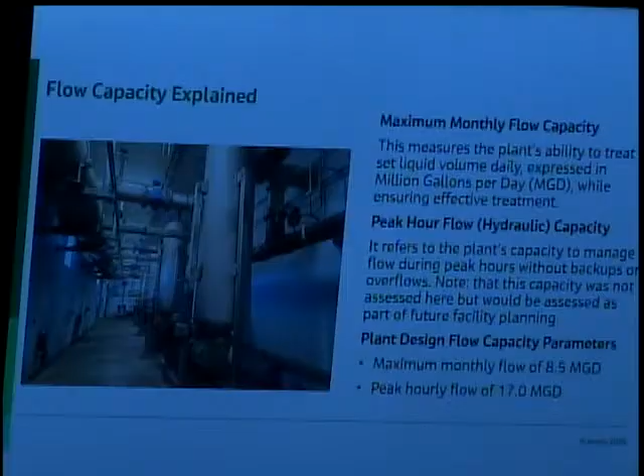So I don't want to confuse those. The plant is designed for a maximum monthly average flow of 8.5 MGD and a peak hour flow of 17 MGD. So those are completely different numbers.

The 8.5 MGD is the max monthly flow that the plant can sustain and treat the wastewater at the concentrations it was designed to treat. The peak hour flow is 17 million gallons per day. That's what they generally refer to as hydraulic capacity - what we can take into the plant during a heavy rain event, or during Cherry Festival, without overflowing the tanks. The plant can handle 17 MGD over an hour, but we're not going through that analysis on the peak hour. We're going to stick to just the monthly max, but I wanted to explain that difference.

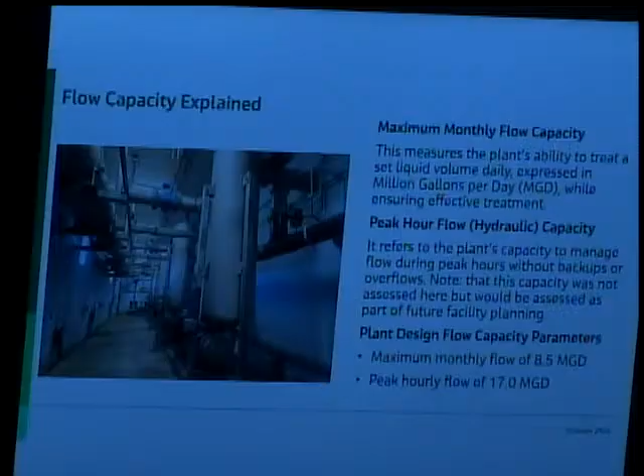The other parameter we're going to look at is loading, so organic loading. We measure organic loading using a test called BOD, or biochemical oxygen demand. All that is, we see how much oxygen demand is on that water, and that tells us how strong that wastewater is. It's commonly referred to as the strength of wastewater.

The wastewater treatment plant was designed to handle up to 20,200 pounds of BOD per day. This is based on that 8.5 MGD flow. While we monitor other nutrients as well, like ammonia and phosphorus, we'll be sticking to going over the main one, which is organic loading. Organic loading draws the highest oxygen demand in the plant, so that's usually the most critical one for design.

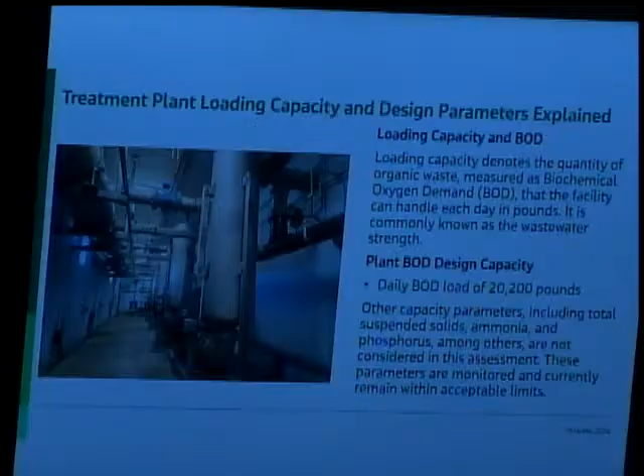Touching on EGLE's recommendations for planning, there's no set-in-stone number you have to reach before you need to upgrade. They provide a guideline of 80%. So if the plant reaches 80% of capacity, they recommend that's when you begin planning for expansion, or at least doing capacity analysis to figure out what you need to do in the future. Once you hit 90% capacity, that's when you should be applying for permits and beginning construction for expansion.

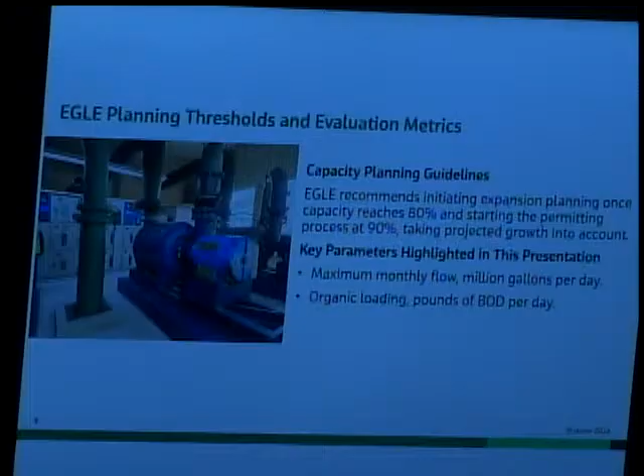Again, these are guidelines. Can I ask a quick question, Mark? Yes. Just, I think sometimes we hear people hear 80% and then they think that's the max, so I appreciate you clarifying that.

Sure, so it's a 10% difference between these two numbers. What's kind of worst case scenarios in your professional experience - you hit that 80% and have to start planning - realistically, barring an entire city being built on top of a city that's already there, how long with most average growth does that 10% take to hit? Would it be a 5-year plan, a 10-year plan?

That's a great question, and I will touch on that a bit later. But to answer briefly, you pretty much would need to know what the growth rate is, because that matters. Typically it would take years to get to that point, but if you're growing exponentially year over year, that changes things. So that would be part of a facility plan and doing a full capacity study.

But we haven't seen growth like that in our area, in Traverse City - at least not those numbers that we've seen so far. We've seen a lot more growth in the last few years than what we have in the past, but that would be best done in a full capacity study.

Okay, great, thank you. Just a real quick question to piggyback on yours - when we start talking about capacity, we've been talking about the membrane train replacements, and I wondered if adding a membrane train would reduce the amount of stress on the existing ones and get more life out of them. Does adding a membrane train increase the capacity?

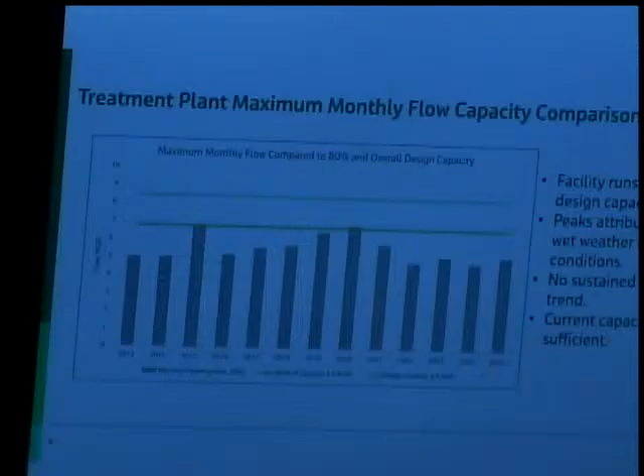So here's a monthly flow capacity comparison. The upper turquoise line is the 8.5 MGD design capacity for monthly maximum flow. The lower green line is the 80% planning threshold, around 6.8 MGD. The gray columns are our max monthly average flow for that given year, in the calendar year, typically occurring in July or August around Cherry Festival, the busiest time of year.

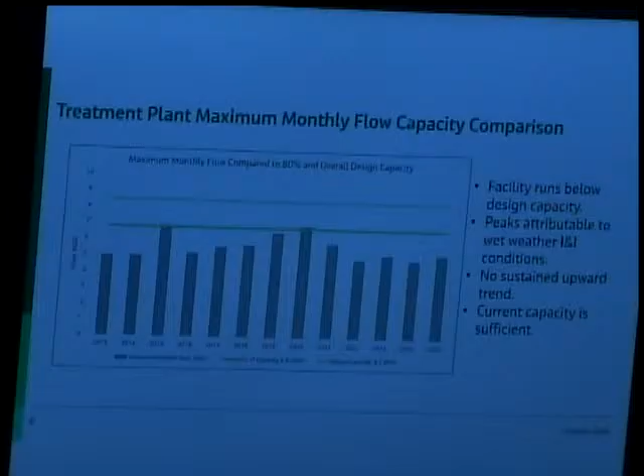We had a couple peaks in 2015 and 2020 where we actually touched or just barely exceeded that 80%, and then it dropped right back off. We can associate those with high lake levels and a lot of I&I from heavy rain events, especially around 2019, 2020. But the good thing is the facility is consistently remaining below that threshold, except for those couple peaks.

And there's no sustained upward trend in flows, which is good to see. Right now, our current capacity for 2025 — July was our highest month, and we were about 62% capacity. Just for reference, the annual average daily flow in the plant, averaged over the whole year, is about 4.4 million gallons per day, so just over 50% capacity.

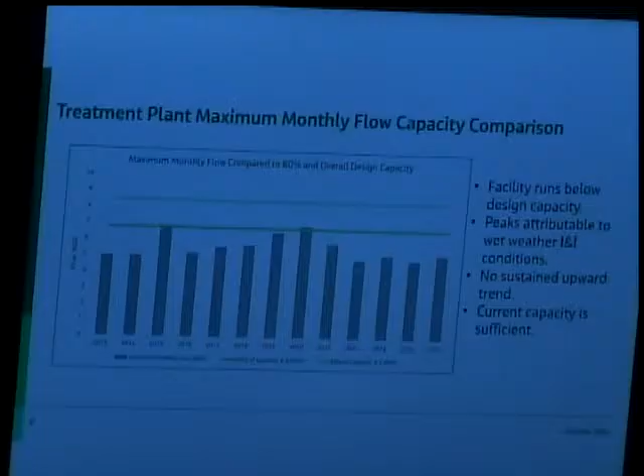Mark, I have a quick question. So for the EGLE requirement of the 80% capacity, when is that triggered? For instance, in 2020 we hit it, in 2015 we hit it. Is it over a certain period of time? If we saw a sustained trend of that, and it was constant and multiple months were exceeding and we were continuing to rise, then I would think that would trigger it — if you're hitting that multiple times.

We know the cause of that at the time — the high lake levels, the I&I. The city's obviously been addressing a lot of I&I with lining pipes and such, so we can control that. We saw that was definitely the issue there. So do we respond to EGLE when we hit it, or is it just ongoing? No, we just audit and track it. Okay, thank you.

All right, so— nope, oh, I'm sorry. It seemed to be, in that last slide, sort of a wave pattern with peaks in 2015 and 2020. I wondered if you went back further before 2015, are there external factors? Do you see that same pattern of peaks and valleys? I would assume we would, but I did not go back that far. I certainly can if you want me to, but I didn't go back to that.

And you mentioned high water levels as being one factor — anything else that jumps out? The heavy rain events themselves. Okay, and thanks — 2015 had that huge storm that hit both counties really hard, yeah.

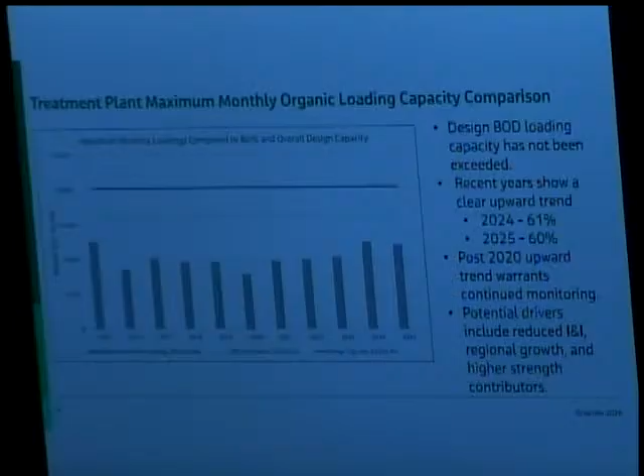So this trend here is just showing the monthly organic loading, maximum organic loading capacity comparison of the plant. The upper gray line is our 20,200 pounds per day design capacity for loading. The lower blue line is the 80% threshold. The plant is well below that, running around 60% at the peak month in 2025. The one thing to point out, though, is from 2020 on there's a pretty consistent rise in that loading.

So that's something we want to keep an eye on. This kind of goes back to what Laura was asking — if that trend continues and we're moving up a little faster than we'd like, then that would trigger us doing a deeper dive into this capacity analysis.

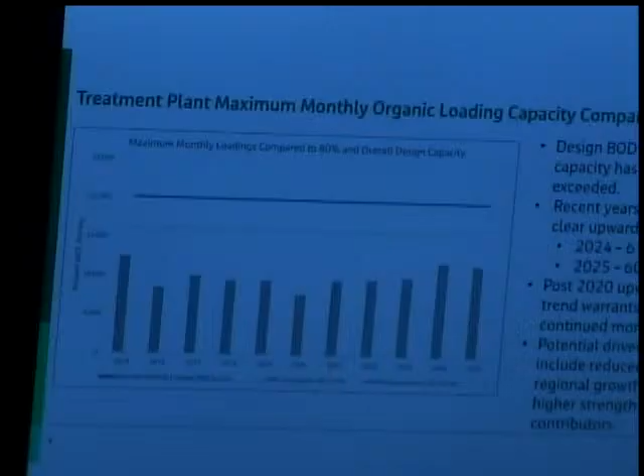I have a question. It looks to me from the data that it's the townships that are really contributing to this BOD loading. We don't have a problem right now—it seems like everybody's within their allocations, but it could be a problem in the future. The city is pretty stable, not moving around very much, but the township is increasing.

So when do we decide that we need to start planning? And how are you thinking about this while you're also working on the master sewer agreement?

I do touch on that, and I will go over the MSA as far as where we stand with the city and townships against the MSA capacities. But I'd suggest, as part of a facility plan—because there's portions of the treatment plant that are older and haven't been upgraded, we're doing a big upgrade now on the headworks, and we did the membranes back in 2004.

But there are other processes that are more biological, like anaerobic digestion and activated sludge. All those processes work together and should be evaluated together through a facility plan, so we have a detailed capital improvement plan going forward. Part of that would be collaborating with the townships and the county, figuring out the full capacity of the system as a whole, and going over the loadings from the townships and everything else.

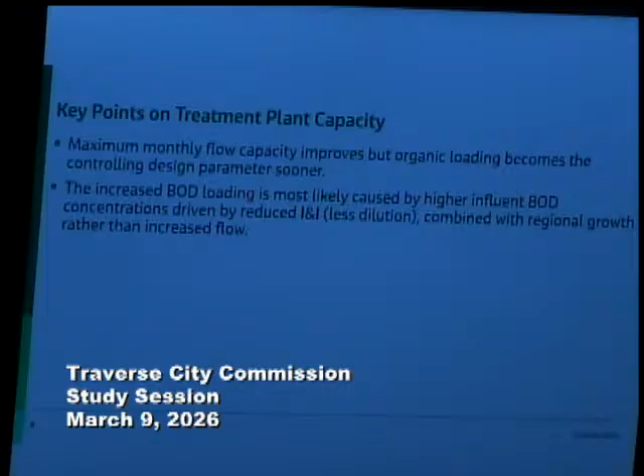So just some key points here: the trends of organic loading are what we want to pay the most attention to, making sure we're on top of that. It does suggest that the BOD loading is most likely caused by higher influent BOD concentrations driven by reduced I&I, combined with potentially regional growth as well—all things that would be part of a full capacity analysis.

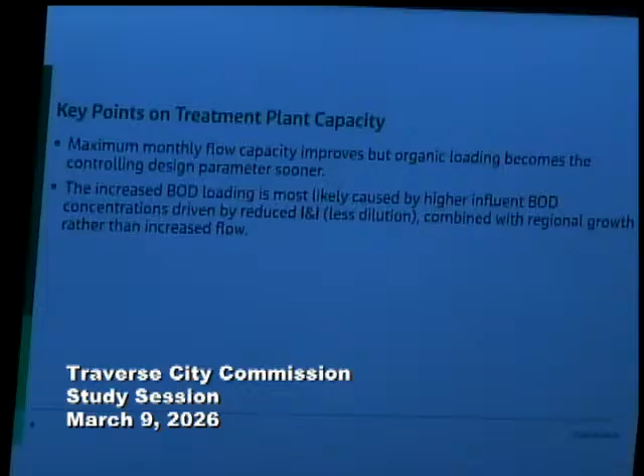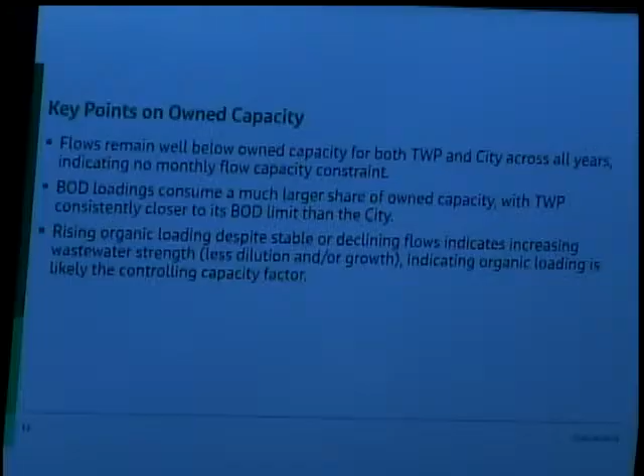Key points on own capacity: flows remain well below own capacity for both. The BOD loadings consume a much larger share of the own capacity, with the township consistently closer to its BOD limit than the city's. Rising organic loading despite stable or declining flows indicates increasing wastewater strength, less dilution, and/or more growth, indicating organic loading is likely the controlling capacity factor.

The main takeaway of this presentation is that, based on current operational data and planning standards, there's sufficient monthly flow capacity and organic loading capacity. However, this review is not a complete capacity evaluation and does not cover all unit processes or potential expansion scenarios at the treatment plant. While there are no ongoing flow-related capacity issues, that organic loading trend is something we want to keep an eye on.

As I mentioned earlier, our recommendation would be a comprehensive capacity study to guide long-term planning and development of the wastewater plant, including stakeholder collaboration with the county and townships. That's in the CIP for next year.

It is. Great. Yes. Go ahead, Mitch, and then Jackie.

Looking at growth projections in the city of Traverse City, yes, we have a lot of capacity. We have a lot of use in both residential and commercial, but we don't have a lot of undeveloped land. We have exactly zero legacy septic systems in the areas fully covered by our sewer system. But if you go outside the city, you find significant portions of the township where it's a patchwork of areas covered by municipal sewer and areas on septic, and there can be new development opportunities that bridge that.

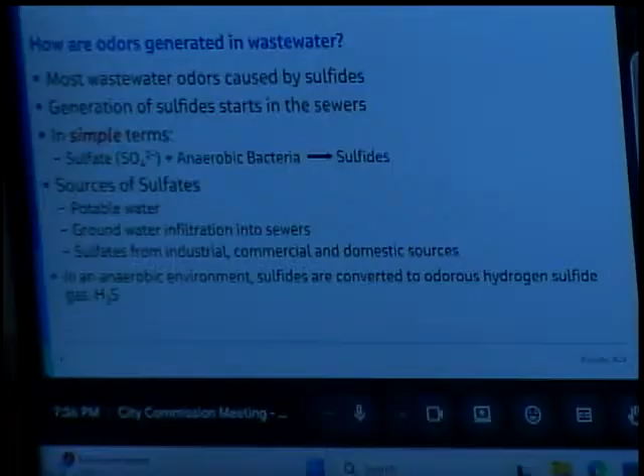So briefly, how are odors generated in wastewater? Most wastewater odors are associated with sulfides. Sulfides actually start in the sewer as sulfate, which can be present from drinking water, primarily for people on well water. When they use that at their tap, it ends up going into the sewer. As discussed earlier, infiltration of groundwater high in sulfate can contribute, and there are also some industrial, commercial, and domestic sources that make their way into the sewer. That sulfate, in the anaerobic environment that typically happens in the sewer, is converted to sulfide, and then also converted to hydrogen sulfide gas.

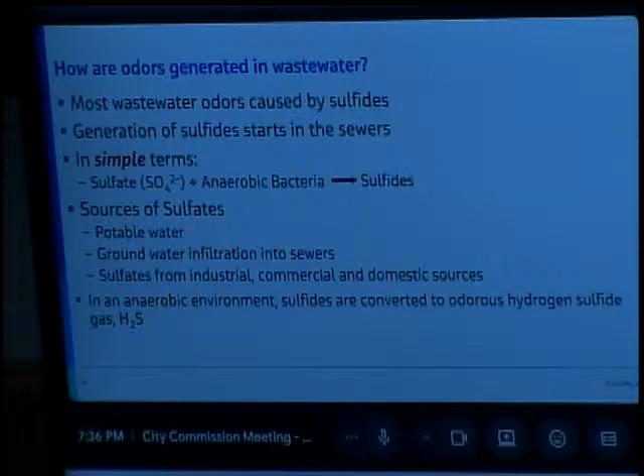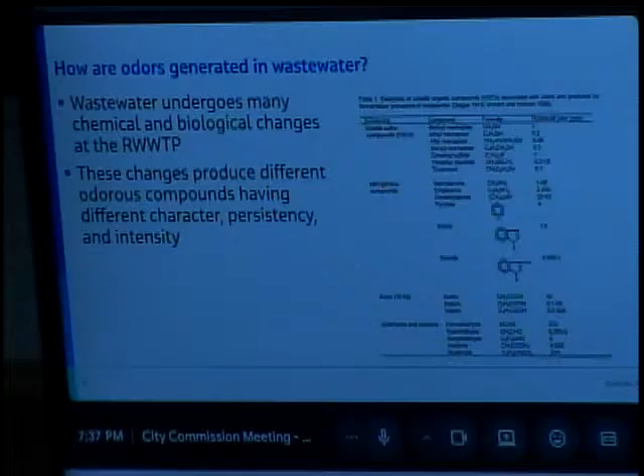Although we're often concerned with hydrogen sulfide, it's important to note that at a treatment plant there are a lot of different chemical and biological changes happening. What you actually see, summarized in this table, is that there's a number of different odorous compounds generated throughout the treatment plant at various processes and parts of the plant. We refer to these different compounds as having a different character, a different persistency, and a different intensity, and that's what makes odor control an interesting topic.

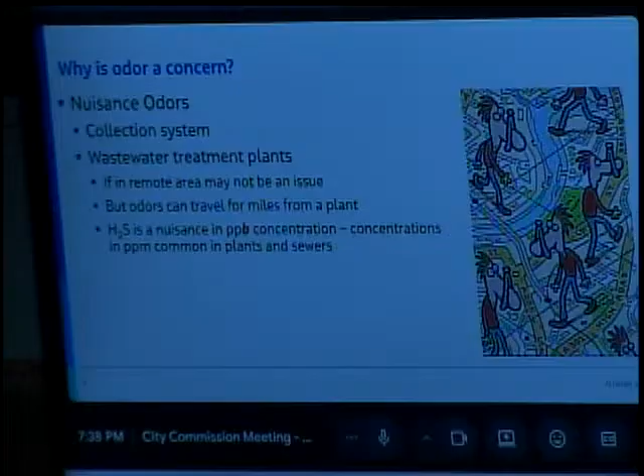So why is odor a concern? Looking at it from the perspective of hydrogen sulfide, it's a nuisance. In the collection system, it's a nuisance because the collection system extends out to where people live, work, and play, so if there's any venting in the sewer, those odors can escape and impact people. When we look specifically at the wastewater treatment plant, if the plant is not in a populous area, it may not actually be an issue. It might lead to some discomfort with plant staff, but you don't have to worry about complaints from neighbors right next to the plant. But odors can travel a long distance.

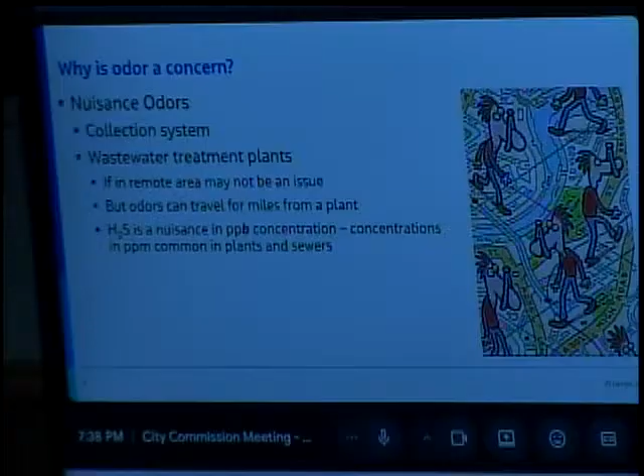Some perspective on H2S: it's a nuisance at the parts per billion concentration for the human nose. We can detect it at very low concentrations. But oftentimes some of the concentrations we see at a treatment plant or in the sewers are in the parts per million range, so 1,000 times more concentrated.

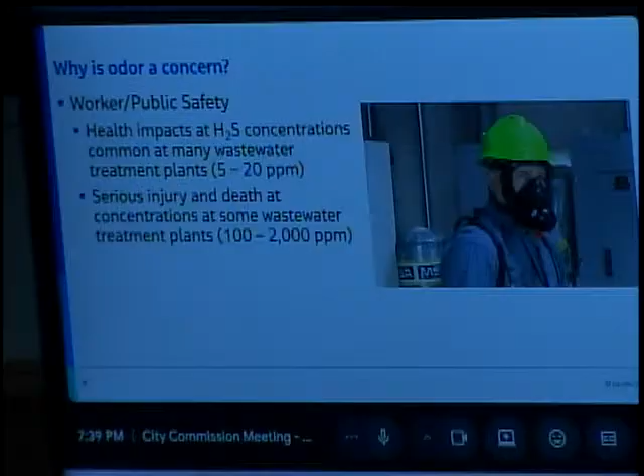Another concern is worker and public safety. At low concentrations, H2S can just be more of a nuisance - it's one of those compounds that has that distinctive rotten egg smell. At low concentrations, it may not have a significant impact from a health perspective, but at higher concentrations it can lead to serious injuries and even death. There have been reported cases of that, for example, when an operator enters a tank that is high in H2S.

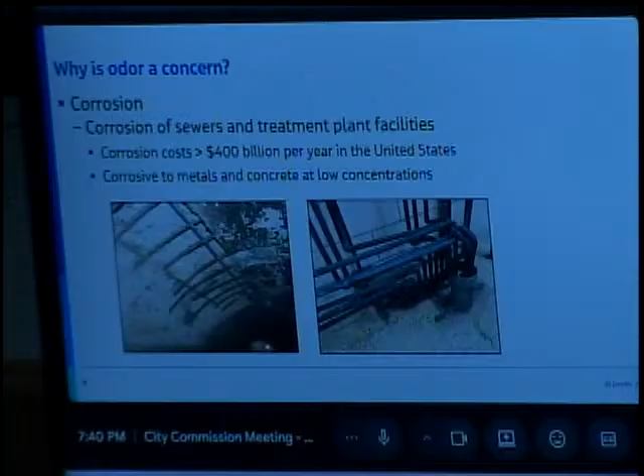And then lastly, another concern is corrosion. We spend a lot of money every year trying to address this continual problem. If we look at the sewers, as discussed earlier, hydrogen sulfide gas can actually also be converted to sulfuric acid. This strong acid reacts with the cement matrix that makes up concrete, and that's why you see it wear away and expose the rebar in reinforced concrete pipe - that rebar also corrodes. If you look at the lower right photo, you'll see this used to be bright, shining copper piping, and with exposure to hydrogen sulfide, it turns black and tarnished.

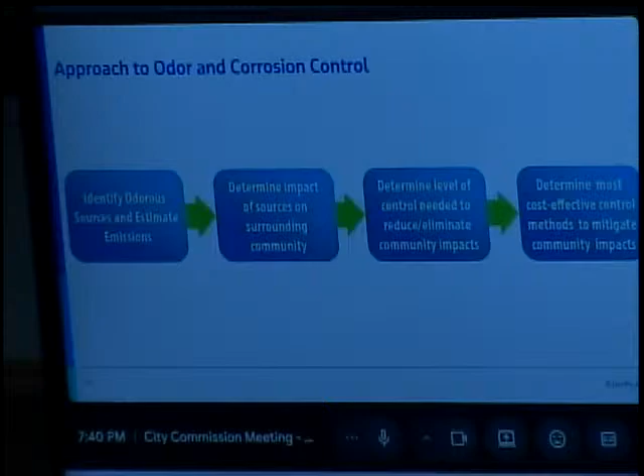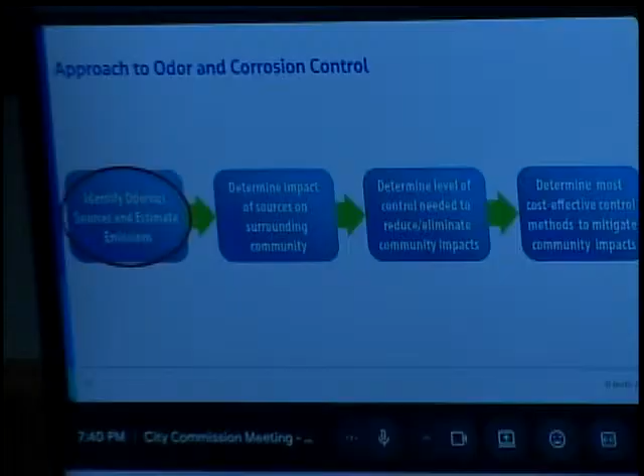So when we look at our approach to measuring odors and evaluating their impacts, we follow this more or less standard workflow. Every application is different, but this provides a good workflow for how we look at these analyses. The first step I'll talk about is how to identify odorous sources and estimate emissions.

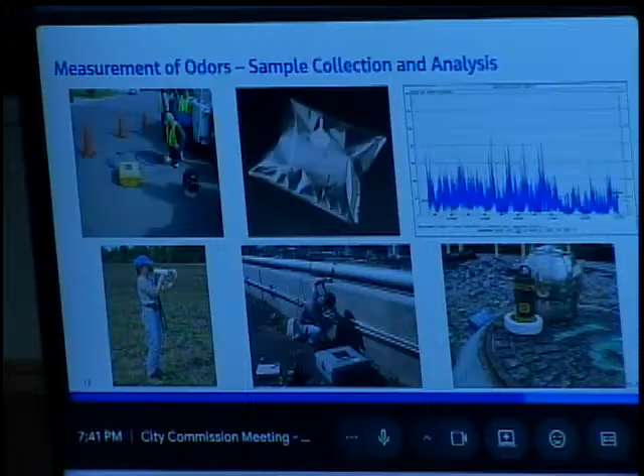The other application is taking grab samples. We've got a vacuum pump, shown with the yellow suitcase, or the gray one in the lower center photo. That vacuum pump is used to fill up a bag sample. So it's basically like taking a jar and wherever you are in the plant, capturing some gas that's in the ambient air. The nice thing about that type of analysis is that we can ship that bag sample to a lab and analyze it in a couple different ways.

One way is you can put it through a mass spectrometer gas chromatograph, that machine in the lower left, and there are different panels you can run. It doesn't tell you everything that's in that gas sample, but it allows you to measure individual components within that panel. But another way we do it is we take that gas sample and send it to a lab.

Typically the same lab can do both tests, but you measure total odor, characterizing the total odor impact of that combined gas sample. From that, we measure dilutions to threshold, which is like a proxy for a concentration of all those odors together. This is an interesting test because they actually hire people and test their noses to make sure they have an average nose.

If it's somebody who's got a really sensitive nose, they excuse them from the panel. And if it's somebody who can't smell anything, which I think we all know people who fall on both sides of that spectrum, they also don't want them on the panel. So they get a good average nose that sits on the panel, and they introduce increasing concentrations.

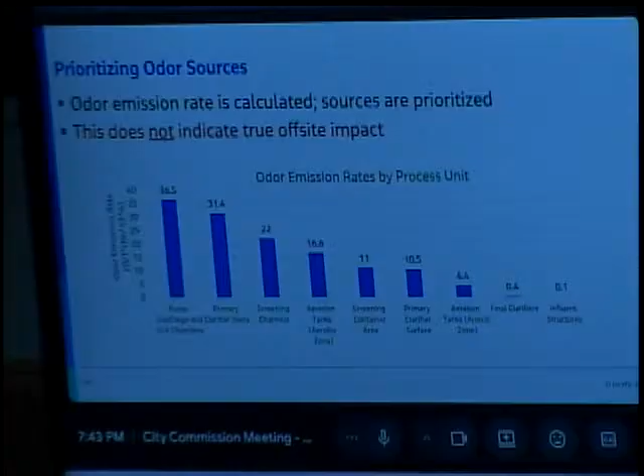They take that bulk gas sample and dilute it down to very low levels, then keep increasing that concentration until the person identifies a detection threshold - when they start to smell something. There's also a recognition threshold, which is when the human nose is able to identify it as something specific - not just 'I smell something,' but 'I smell it and it smells like X, Y, or Z.' So that result, the D to T odor concentration, we use to calculate the odor emission rate.

That doesn't tell us exactly the offsite impact, but it does allow us to prioritize sources. If you look at this graph here, an example from another project, you might look at the final clarifiers and say we don't really have to look at those further. Our main goal should be to look at some of those headworks processes like grit chambers, primary clarifier weirs, or screenings channels.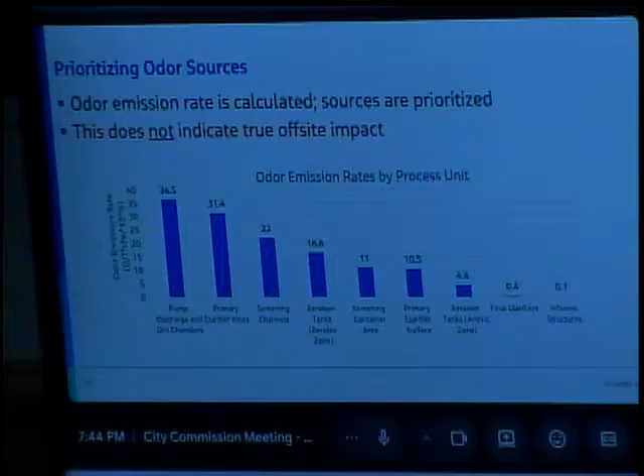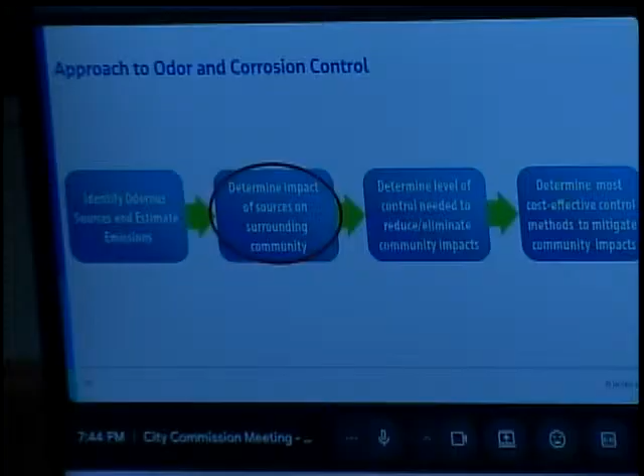It could be the surface of a clarifier or the surface of an aeration basin. The idea here is that there's some flux of odorous air, of mass, that leaves that surface and travels some distance. Eventually when it reaches ground level, let's say outside the plant fence line, it's been diluted. We get a sense for the impact of that dilution factor by factoring in all the meteorological data and also topography.

So it factors in wind speed, it factors in potential temperature inversions that might happen due to the topography. If you have a tree line, or in the case where you might have a large city with skyscrapers, it can look at the impact of those large buildings present.

The two programs we typically use are AERMOD, an EPA-issued program, and CALPUFF, which is a parallel that came out of California. The reason we'd use both in this case is because AERMOD is really good at capturing this information on a regional basis, but CALPUFF has this added feature that allows you to better capture meteorological effects when you're close to a large body of water. So the Great Lakes is a great example, or if you're on one of the coasts, CALPUFF does a great job of that.

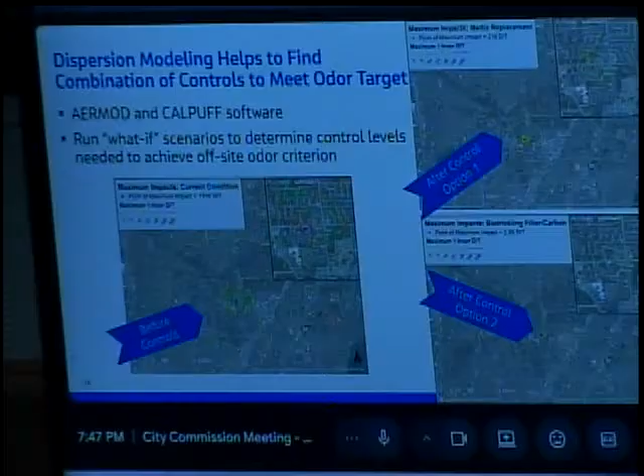And ideally, we can get this where that odor risk doesn't extend beyond the plant fence line, or if it does, that it happens at such a reduced frequency

that you effectively don't have any risk of odor complaints or any real impact to neighbors. Now, we do know that community engagement is something that you've expressed some interest in, and community engagement is a really good thing. It's sort of a double-edged sword in some sense for the utility, because it does require fielding complaints from neighbors if they arise. But the great thing is that you don't know if there's an odor issue unless people tell you about it. So that is a great data collection source.

And some of those odorants are highly associated with different parts of the process, and it might indicate to the utility we may have an issue with the aeration basins or the digesters. So there's a lot of good information that comes out of that.

The other part of it is that it shows your residents, your ratepayers, that you care and that you are competent in following up and seeing these things through, and that leads to a lot of trust and transparency, and also some motivation to study these things and move them forward.

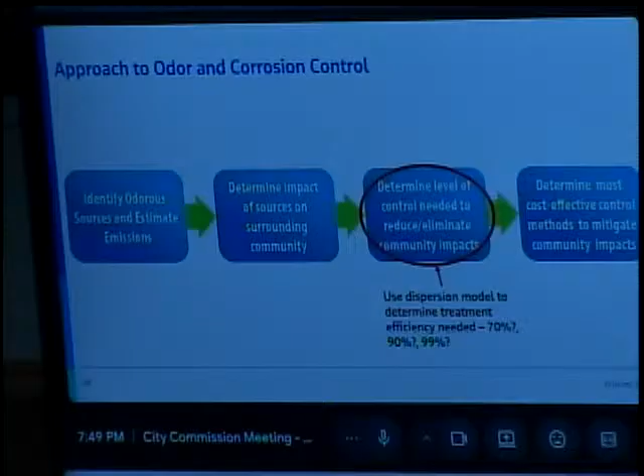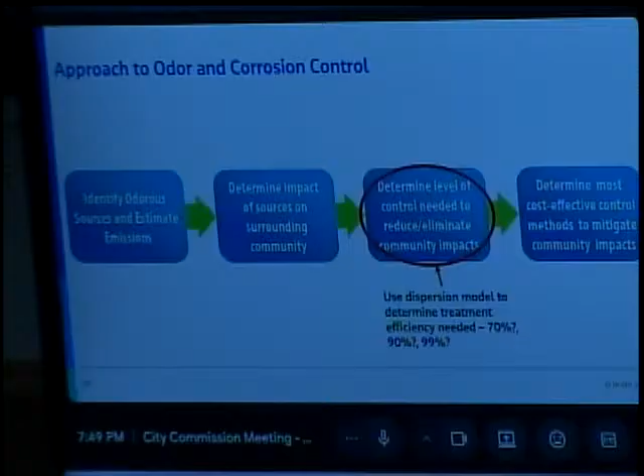So once we've done the air dispersion modeling, that helps inform us of what sort of treatment we may need. Sometimes it's treatment, sometimes it's actually prevention through design, or it might be an operational change that actually makes a difference. Maybe addressing leaks or addressing building ventilation rates, that can lead to some improvement.

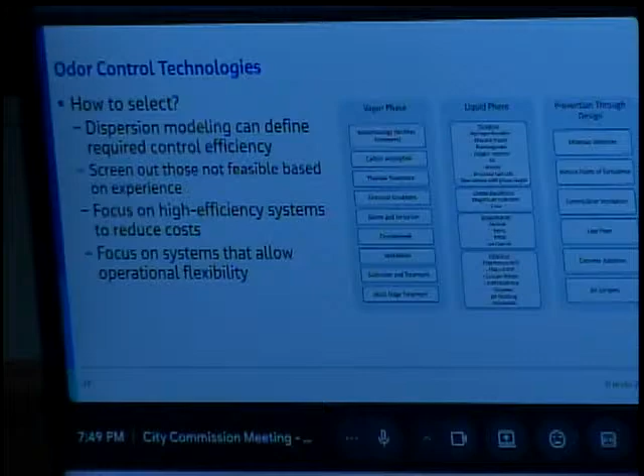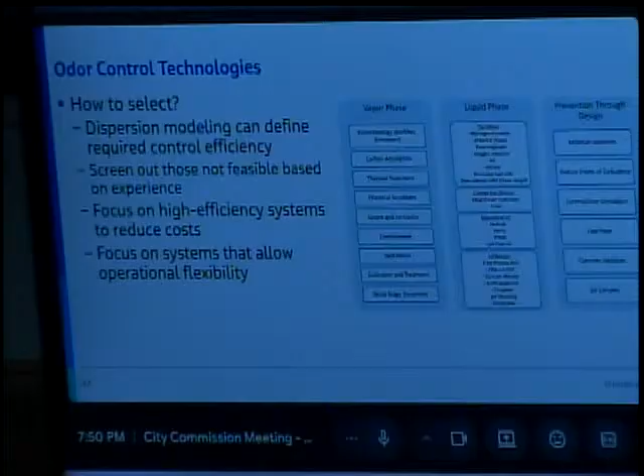I won't go through all of these technologies, but it's just to give you an idea of some of the options that we can look at. And we're well versed in nearly all of these. The ones that are sort of maybe questionable at this point are brand new technologies that haven't seen a lot of applications yet. So there's often a little more hesitancy with choosing those ones or pursuing them.

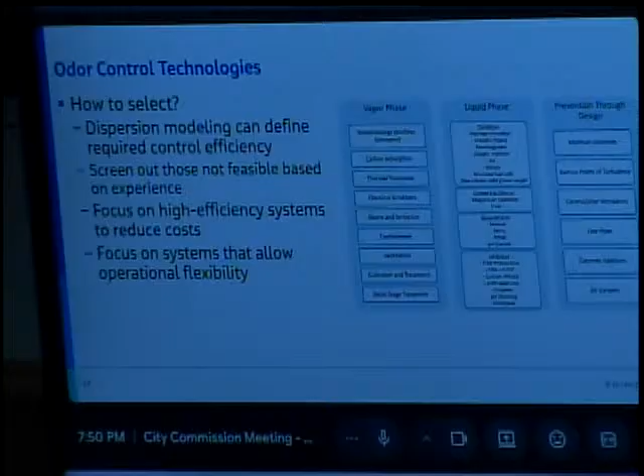But the nice thing is that we bring a lot of experience from our other projects to identify which ones are feasible, which ones have high efficiency, which ones give operator flexibility and have lower O&M costs associated with them. So that would all be part of this study.

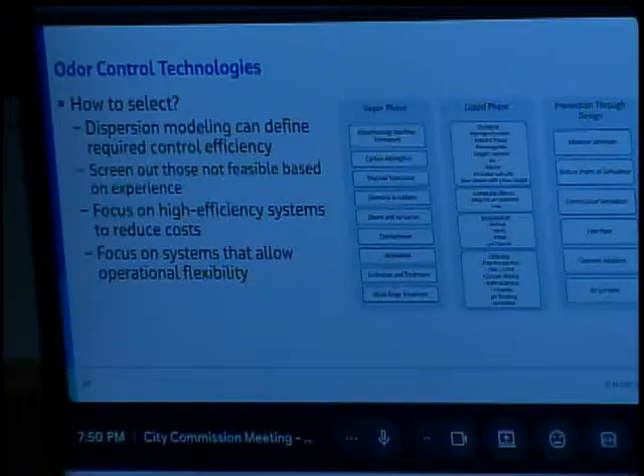And the idea behind that is, where the plant is located close to very desirable places like the beach and your downtown location, those graphics that come out of an AERMOD or CALPUFF model can be really useful in conveying the results of the study to your residents. Finally, we'd wrap this up in an alternatives analysis and a tech memo.

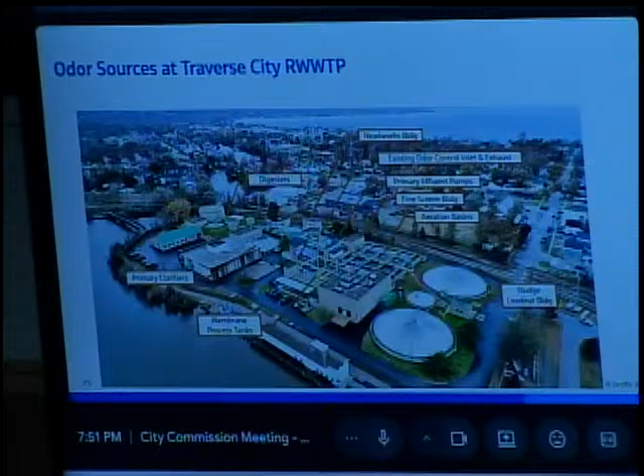So last slide here, just the main goals, to reiterate them, would be to analyze the existing odor treatment system, identify odor sources and estimate those odor emission rates to allow us to prioritize them, evaluate the offsite impacts through the air dispersion modeling, and then use that to comprehensively review the improvements or technologies you might consider looking at in the future for any capital improvement projects.

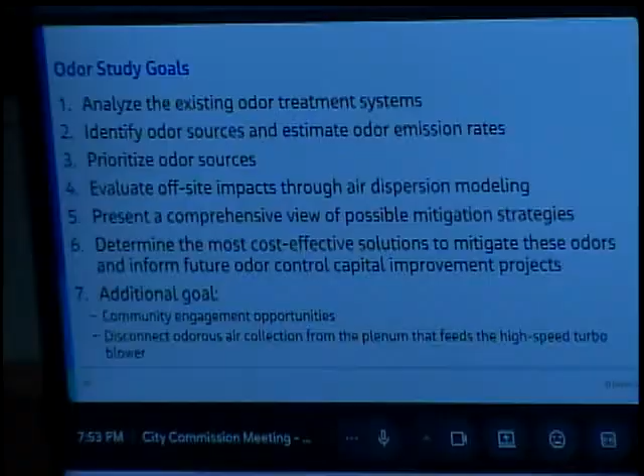And then just to tack on a couple that we know are specific: community engagement opportunities, so providing a framework for how you might pursue that in the future. And also disconnecting, this one is specific, but you're currently sending some odorous air to the plenum that feeds the high-speed turbo blower. That is an approach, a technology in the list that can be used to treat odorous air, but unfortunately that air does have H2S in it, so it is corrosive. So to extend the life of that turbo blower, we'd like to disconnect that air feed to it.

So with that, I'm happy to answer any questions.

Lance, go ahead. Yeah, just, do we have current H2S monitoring data at the plant? Is that happening currently? Just with that being both a quality of life and a safety issue.

Yeah, so as far as plant staff, some of the buildings have gas monitors within them, more like the Headworks buildings where it's more prevalent to have gases come in. Operators also have individual units, gas monitors that they wear. And as far as the odor control system itself, there is H2S monitoring on just the odor control system, but not throughout the different processes.

Okay, are we seeing that in parts per million or parts per billion, that residents might be smelling? Oh, I can tell you about that. I mean, we all smelled something, that's for sure. Yeah, right.

Yes, I do. I'm trying to remember what the concentrations are. I want to say it was in the 0 to 50 maybe parts per million H2S, I think on the outlet side of the odor system, but. Okay, just something I think does like to vary through the seasons with the temperature as well.

So we spent the last 14 months or so developing this vision. Some of you might have participated in some of those events, the Imagine Rotary Square events. Really excited to talk about this project. I'm going to invite Jason Ball up here, our lead consultant from Progressive Companies, to help us develop this site and work with the civic engagement. I'll let him talk about the project, and then we can answer any questions you might have.

Thank you, Harry. Good evening, Commissioners. Again, my name is Jason Ball from Progressive Companies. I'm going to very quickly go through some background on how we got to today in terms of our engagement process. We'll quickly pop through the conceptual designs, and then happy to answer any questions you may have about the relationship between Rotary Square, the alley, and the existing parking spaces.

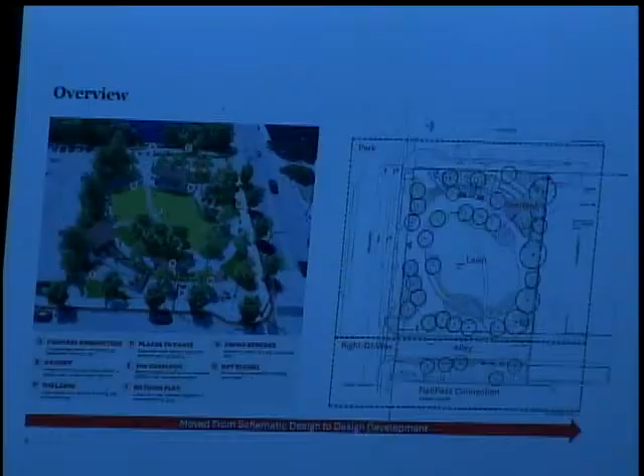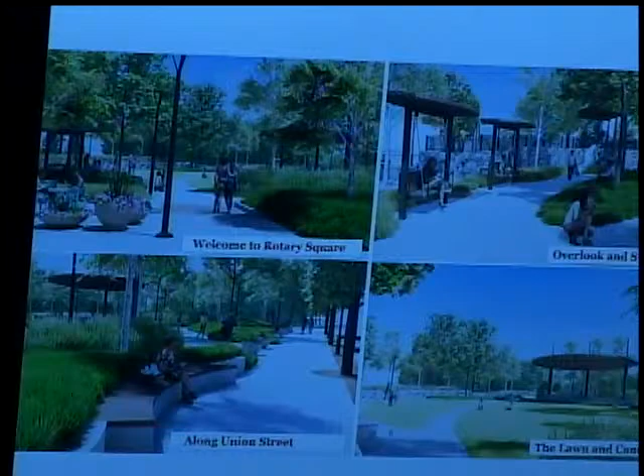I know you all have a much more detailed design packet, so I won't go through all of that, but just some highlights on the overall design, going clockwise on this slide. On the upper left-hand corner is our welcome to Rotary Square. This is if you're standing at the corner of State and Union and looking southeast over the square. This is that rendering of the entranceway.

To the top right-hand side, just to the right of the first picture, we have the area that we've focused more on having it be more family-friendly. We also heard really clearly that we wanted Rotary Square to be a place for everybody, but we didn't want it to be a playground. So there are some features we've planned, like swing benches. There's a small slide over an overlook area that are more family-friendly, more geared towards kids, but it's not the whole square.

On the bottom left-hand corner of the slide is the view if you're looking south down Union Street. So again, this is something we tried to navigate - wanting to be sure we still related well to the street, but also that Rotary Square felt separate, like an oasis within the city. So there are seat benches or seat walls that face the street, but also an opportunity to easily get to Rotary Square that's easily visible where you're not on the street right away.

And then the last image in the bottom right-hand corner is in the lawn, looking at the large shade structure to the southern portion, just north of the alleyway. That shade structure is designed to be a nice place to sit with movable tables and chairs most of the year, where you can have lunch, grab a cup of coffee, have a conversation with a friend. It also is the place to host events or small concerts with all the necessary utilities and things located there.

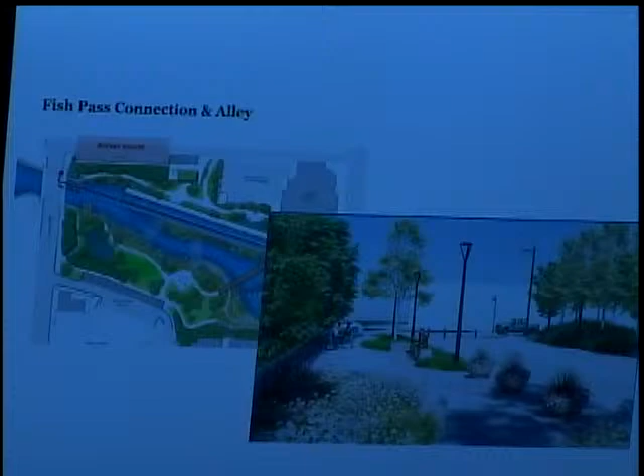But then also in the alleyway, we have some removable bollards. So if there's an event, those bollards could be in place to limit vehicular traffic. But if there's not an event, the alley would function just as it does today for vehicles to move through.

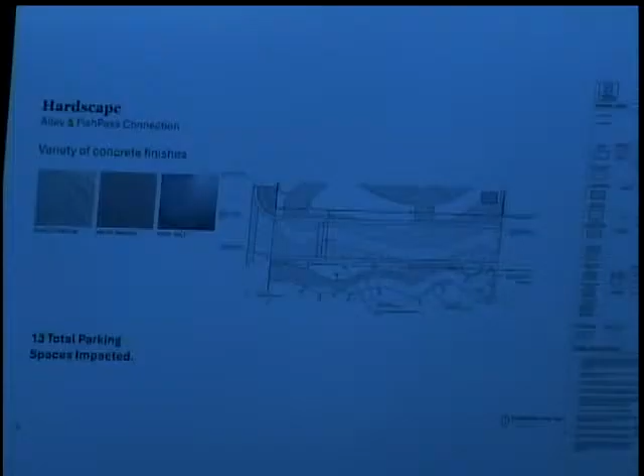Because we are now into our design detail work, we do have the alley. There's a curve shown on the alley. All that is we're showing different concrete finishes. The intent there being that the pavement in the alley is different from typical alley pavement, so if you are passing through that space on a vehicle, there's a natural recognition that it's a pedestrian space and you should slow down and pay more attention. But again, that would be open to vehicles when there's not an event or something happening at Rotary Square.

So that's a really quick overview. I recognize that many of you have been part of other things that we've done throughout the process. Happy to answer any questions you may have.

Go ahead, Heather. And maybe this is a question for Nicole: can you see how many people are using those parking spaces?

I have never parked there in my entire life, but others have. In the presentation I provided, you can see that revenue is roughly $1,300 a year per space. That's actually higher than per space in Lot B, which is funny because you don't really see utilization, but when they are parking there, they're parking for longer periods. That lot is typically used by a lot of employees because it's a 10-hour lot. As far as actual utilization numbers, it's hard to do. We have to go by revenue per space because we can't really see duration, so we just go by peak months.

Go ahead, Laura, and then Lance. Quick clarification: when I looked at the notes from the presentation, it looked like the anticipated loss of those spaces was going to be about $22,000. Is that correct? Yep.

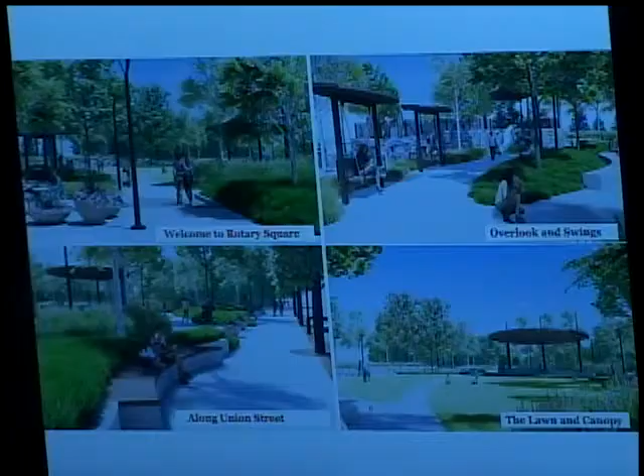Thanks, good question Jackie, because I forgot to ask that after the DDA one. Other questions? Go ahead, Heather. Are we just taking questions about the parking, or? Well, I think we're trying to focus on the parking, but we can certainly ask questions about the project since we have you.

I have one question on your final concept drawing. It looks like you've got geese and ducks, or maybe a bunch of pigeons in there. I hope that whatever you're planning to plant in there is something that deters geese and ducks. Yes, there are certain grasses that do that, so I'll leave that to you, because we don't need any more of that. Ugh, the open space is horrible sometimes.

My other question is, it says in the executive summary that you developed an operations and maintenance plan, but it's not in the packet. Yeah, correct. The operation and maintenance plan we have with DDA, we're waiting to finalize it until we get through our final design development process and know exactly what plants are going to be planted and what that requirement is. I don't know, Harry, if you want to speak any more to ongoing maintenance or funding requests. We could just wait for it, but I'm very interested to see that.

So as to the alley and the parking, which, thank you for bringing it back to that too, this is us deciding, making a decision if we go along with this, because this is our property that we own. That is what we want to do, to see this improvement to the park access, to see that ADA accessibility.

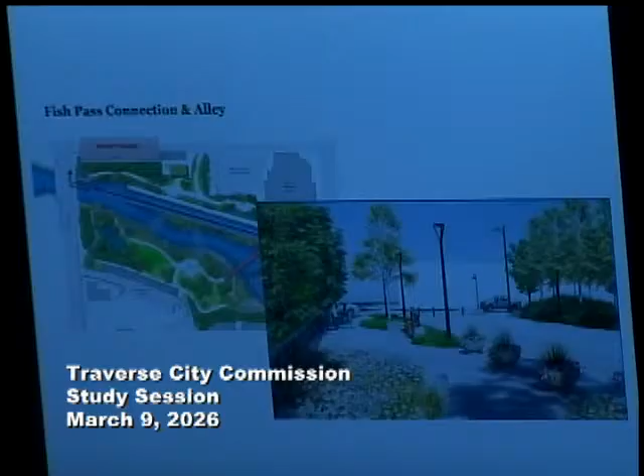So there's a sidewalk planned along that fence - it's a little hard to see on the top part of that slide - that would connect to that building and then ultimately across the river. So I don't actually have to walk in an alley where there are cars to go from Rotary Square to Fish Pass? Well, to get to Rotary Square from Fish Pass, at some point you're going to have to cross that alley, whether on the sidewalk adjacent to Union Street or through the middle of the alley. We heard loud and clear during the process that the alley had to stay open - one of our original designs was to just close the alley and make it all Rotary Square, but we heard very clearly that wasn't a good option, so this is coming up with a solution.

So the alley is still there? Yes, you can drive. And the alley is the primary access to things like Central United Methodist Church's parking lot, and the parking lot by the Women's Library.

There are a number of used private AT&T parking lots that are accessed from that alleyway, so people are driving through there all the time.

The other thing I'd add to this discussion is access, the potential access to public restrooms. We've had conversations with Fish Pass and the city about availability and access to public restrooms at the research facility. No agreement has been made, but we're in conversations, so this would actually provide direct pedestrian access to potential public restrooms for Rotary Square. As you can see from the design, we don't have restrooms as part of this design, so we're looking at adjacent spaces. That could be one as future plans for the West End parking development mature. There could be a restroom in that design, but we're not there yet. So this would provide access to the Fish Pass, but also potentially a public restroom for Rotary Square.

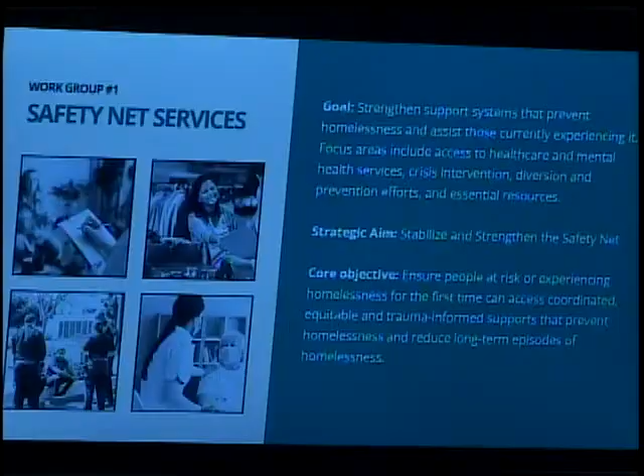Recommendation group 1 is out of Safety Net Services, which focuses on preventative efforts to stabilize and strengthen the safety net so we can stem the inflow into homelessness. To end homelessness, we need to make sure folks are not coming into homelessness at a high rate and that they're also leaving to housing. So this is focusing on the inflow.

A recommendation out of this work group is to strengthen coordination, system navigation, and outreach to reduce inflow and returns to homelessness. That means refining the housing navigation system, doubling down on our diversion efforts, and having a well-coordinated system to reduce the amount of time people are in homelessness.

Next is investing in targeted prevention and housing stabilization to reduce first-time homelessness or returns to homelessness. We know the greatest predictor of long-term homelessness is becoming homeless that first time. So are there targeted prevention efforts we can leverage to make sure that's not happening at a high rate in our community?

Next, housing solutions. This work group focused on expanding and sustaining housing solutions that actually end homelessness. Recommendation 1 is aligning local financing tools and development incentives to increase the production of deeply affordable housing, meaning housing for people making 0 to 30% of the area median income.

That could include innovative financing mechanisms and homelessness-informed developer incentives during project planning. An example happening right now at the city level, which we see as a success, is the Housing Commission allowing units set aside for 0 to 30% AMI for the new City View project on 8th Street. That's an early success we can point to.